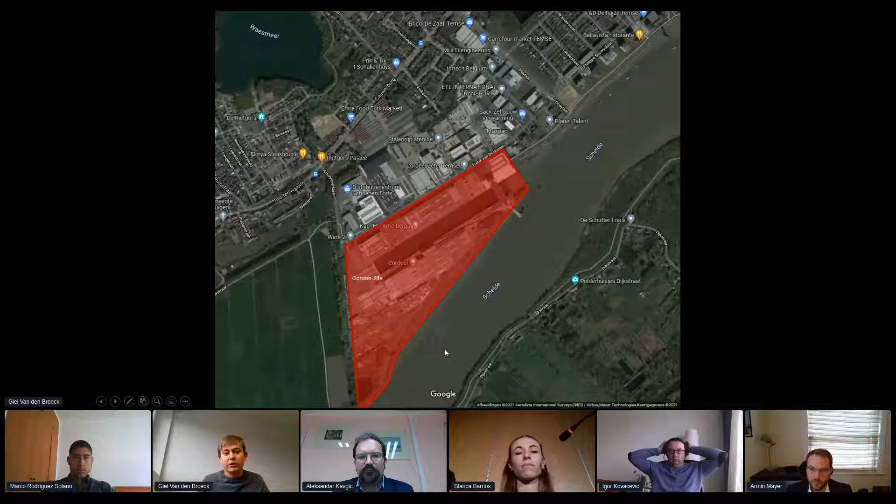But actually, Cordeel, of course, although it spans a large area in the city of Temse, we also have some interesting neighbors that we're willing to involve into this project. But first, let me show you already some of the energy assets that we have deployed in the past couple of years. First of all, we're prototyping and testing here floating solar PV panels in the dry dock.

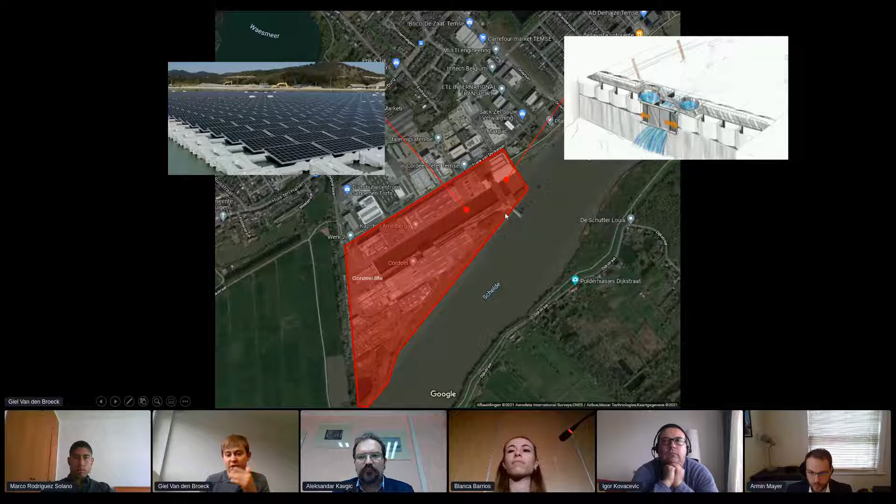Next, within the dry dock, because we have the river Scheldt nearby, which is running all the way to Antwerp, we have the capability here to also generate energy from the tides. So we can generate tidal energy by opening those gates when water is high, and vice versa when the water is low, empty our reservoir again and generate electricity that way. Besides also having some limited storage capability by pumping water back and forth.

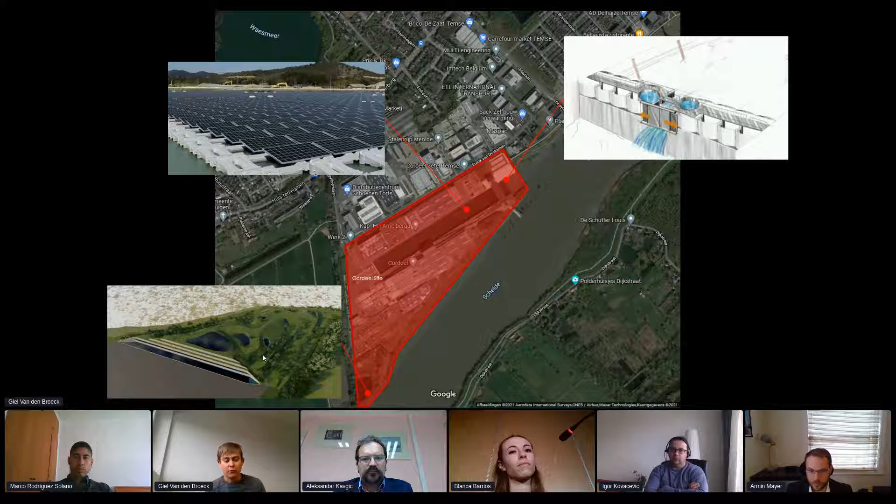More hydro energy on site that we harvest is by means of our energy hill. That's currently in the planning phase. So we use there the natural height difference that we have to cover about 10,000 cubic meters of water volume, spanning about 1 megawatt hour of electrical storage capacity.

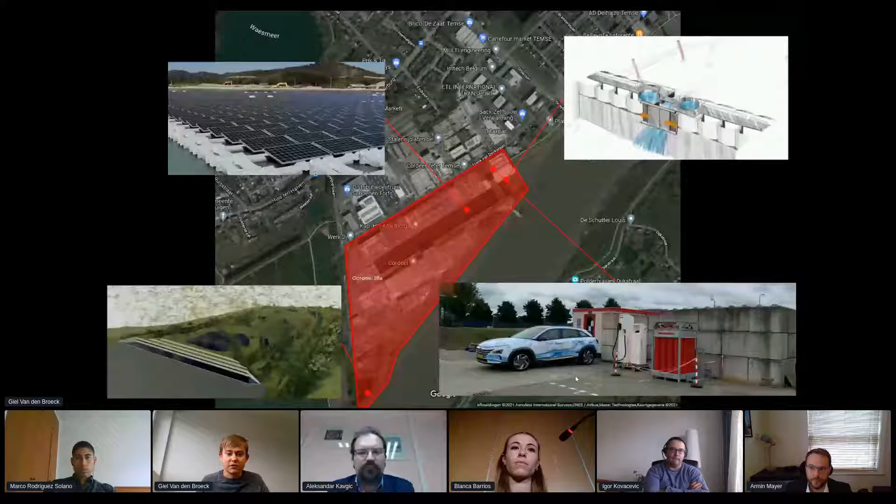And then finally, also at the level of hydrogen, alongside, obviously, regular EV chargers, we also have a refueling station for hydrogen that has been installed early this year. So we're trying to experiment with all these energy vectors on site to gain experience with them from a technical, operational, and also business level perspective.

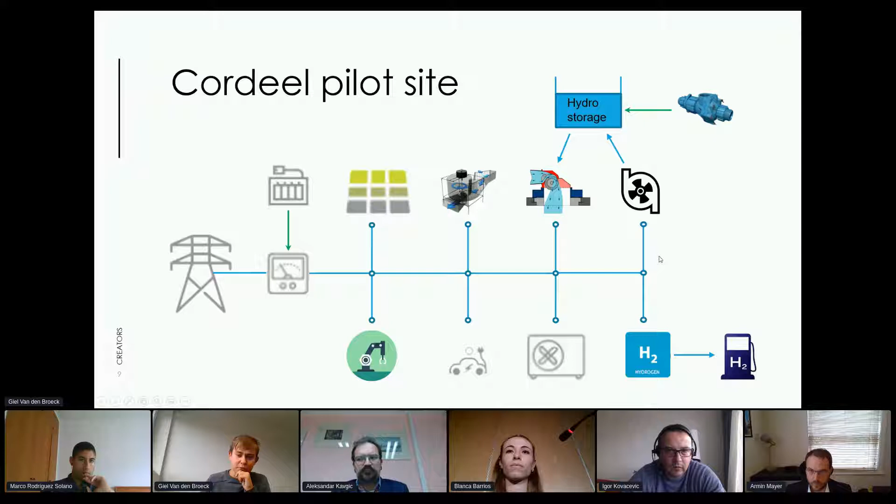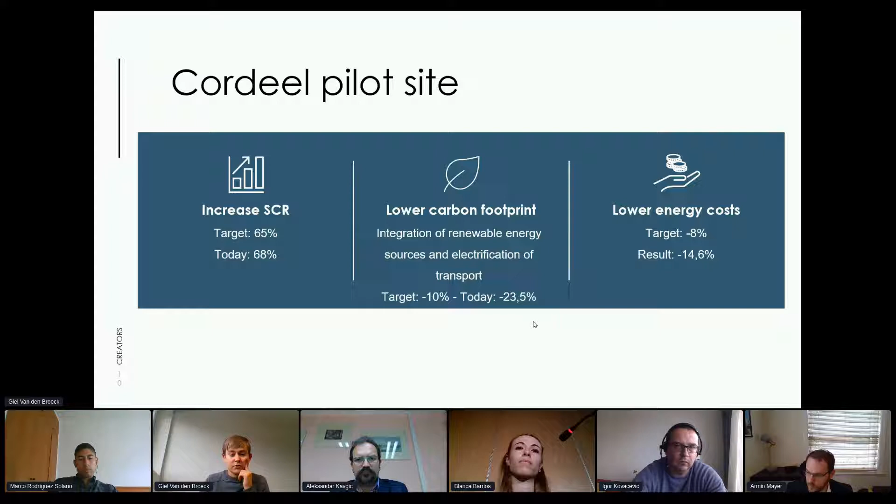Throughout the years, we set ourselves a target to increase our self-consumption ratio of PV generation. Currently, we are at 68%, while our target initially was 65%, but we have adjusted that now up to 80%. Of course, our main and central goal is to lower the carbon footprint of the site as such, where we currently achieve about 23.5% of emission reductions. And of course, this also has an economic benefit in terms of lowering our energy costs.

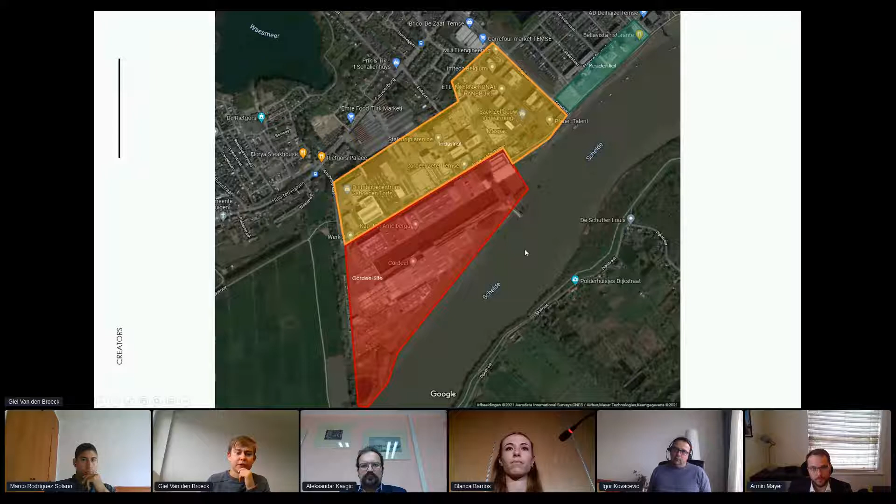So this is in a nutshell what I already presented. Something to highlight here is, why do we propose a local energy community here? That's because we observe that there's a significant mismatch between our on-site solar generation, especially in summertime, and the electricity consumption at that point in time, in weekends, but also during holiday periods where the entire site is basically shut down.

And that way we can use that electricity in the local apartment residences, as well as power the neighbors that continue working during those periods of time, as well as prepping that local energy community to also aggregate the flexibility reserves we have on site and provide those services to the higher level grid to help achieve the overall balance.

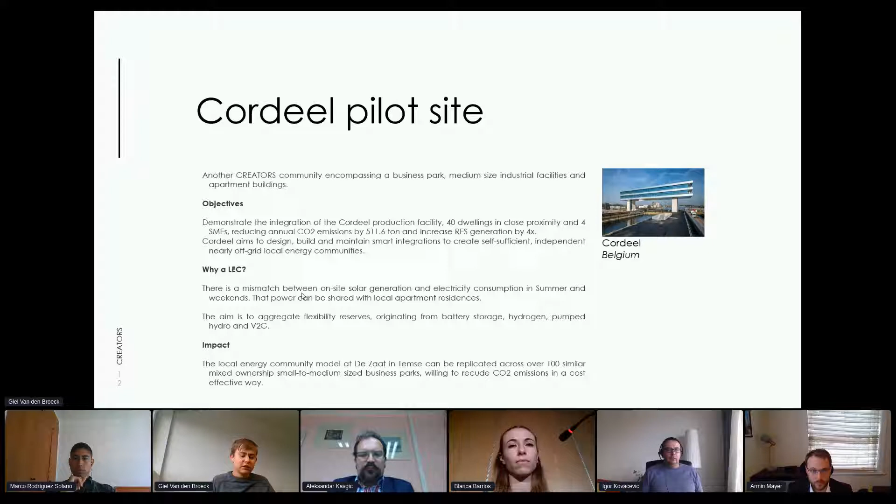alongside having a level of redundancy in the system that in case a cloud connection would fail, we still have some local control in place that makes sure that the system continues operating. Likely not in the most optimal manner as the cloud energy management system provider would provide you with, but still it will work and the lights remain on.

So that's in a nutshell what we have been doing in the past year, and also about the Creators project in general, what we're aiming towards.

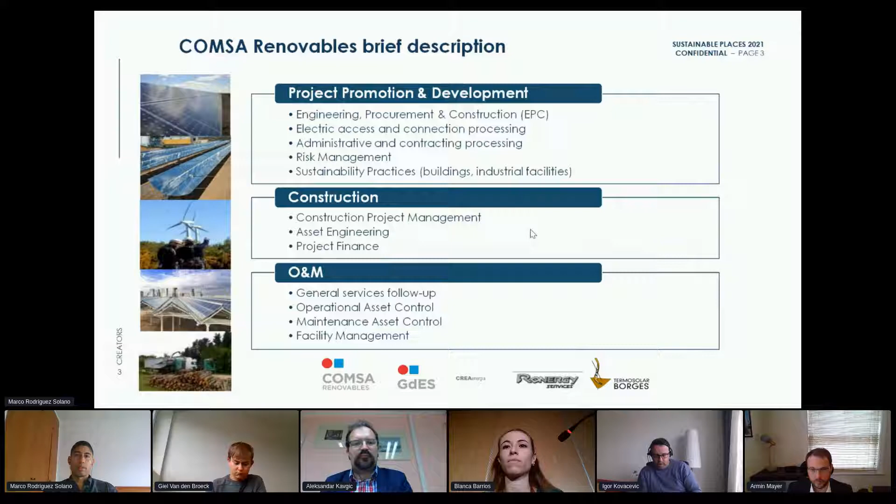But then we also promote different risk management studies, sustainability practices studies as well in the tertiary building sector and industrial facilities as our main core business. In terms of construction tasks, we develop also the construction project management, the asset engineering and project finances. Finally, we develop the operation and maintenance of these assets, buildings, industrial parks as well. And then general services follow up, operational maintenance, asset control, and facility management in general.

Well, a general view from the global building sector, just to introduce the topic more. Nowadays, according to one report published by the International Energy Agency, the CO2 emissions report says that CO2 emissions grew 4.8% after the pandemic lockdown that we had last year. Then 40% of the global energy consumption comes from the building sector in general. And 36% of the total CO2 emissions in the European Union are produced in the building sector.

So this is one of the sectors that we need to abate somehow in order to reduce the GHG emissions, in conjunction with some energy roadmaps, public-private alliances in countries, and a proper mentality change in societies. And with this, also the implementation of new green tech to accelerate the energy transition, we will manage to control these CO2 emissions and to reduce them as well.

Speaking more about the Spanish self-consumption scenario, as we are a company headquartered in Spain, we're looking through the scenario of PV self-consumption and the application of these scenarios in the Creators project as well. So here we have the scenario of the new installations for self-consumption PV in Spain.

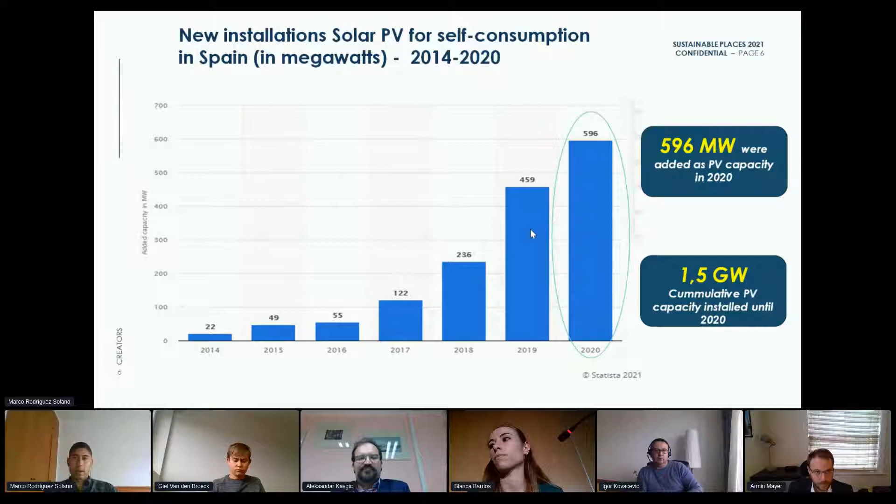For the year 2020, or last year, we had 596 megawatts of PV capacity installed, compared with only 22 megawatts in 2014. So there has been a 1.5 gigawatt cumulative PV capacity installed during the last 6-7 years. So that has been an interesting number to take into account.

Another important data is the scenario by sector in Spain last year. The residential sector accounts for 130 megawatts, the commercial sector for 137 megawatts, and finally the industrial sector, one of the most electro-intensive sectors, accounts for 334 megawatts.

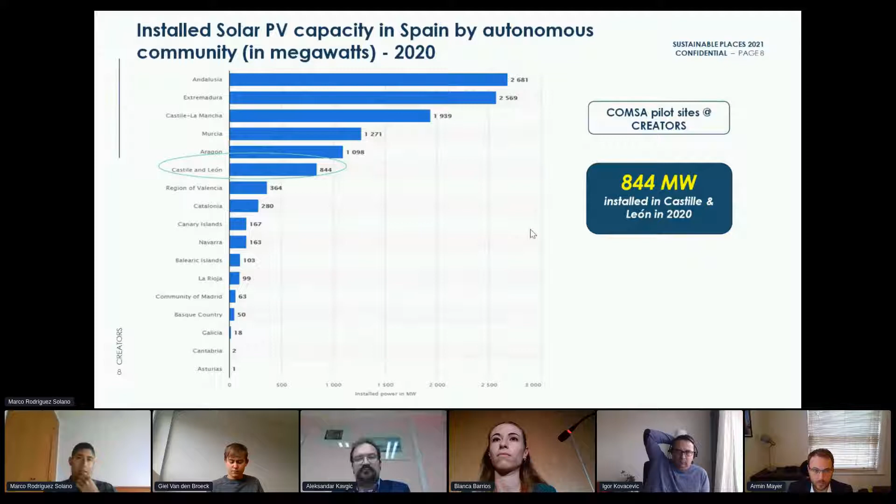So why are we focusing on the Spanish scenario? Because the Creators project has 2 pilot sites in which COMSA is involved, and both of them are in Spain. One of these pilot sites is located in Castilla y León, the 6th autonomous community, that has 844 megawatts of installed capacity for self-consumption. And then Catalonia, where we have another pilot site working on Creators. It has 280 megawatts installed right now.

So that's why we're focusing on these 2 autonomous communities at this moment, in which we want to develop local energy communities. In the case of Castilla y León, in an industrial park, and in the case of Catalonia, at the port of Barcelona.

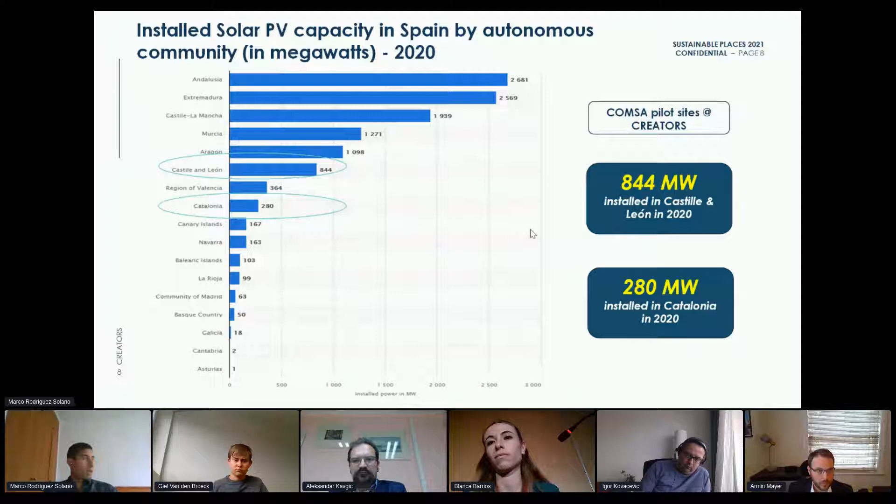So getting into the topic, this is a brief introduction of what a community energy system is. Basically, this is a scheme in which we can interconnect all citizens, SMEs, and other participants in a decentralized energy scheme, enhancing the figure of the prosumers. So we will gather investors, associations, prosumers, suppliers, and local authorities that want to participate, develop these new technologies and deploy them in other pilot sites, taking as reference the pilot sites of the Creators project.

So basically, this is a diagram of how a local energy community will work, in which we have different multi-users and multi-vectors. So we have here the CES, or Community Energy Systems, prosumers, that will be the industries, the households, or the citizens or common participants that can have an installation facility to be interconnected with the local energy community.

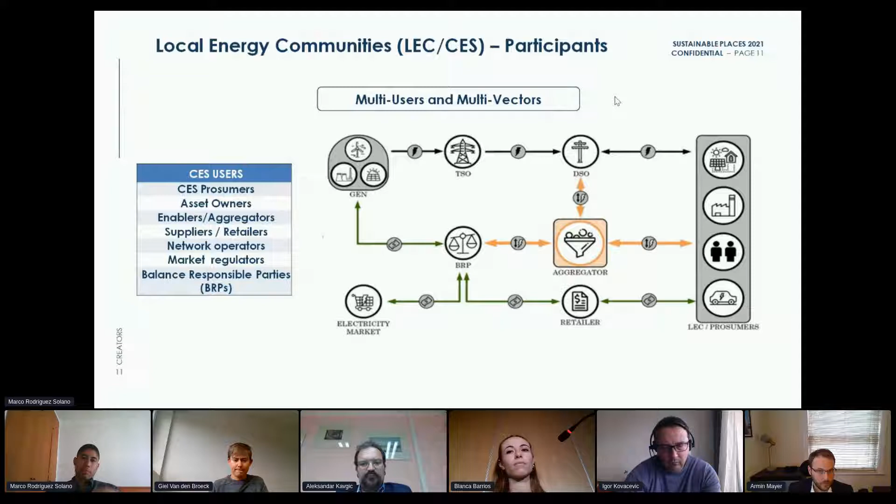Then we have the asset owners, or the enablers and aggregators, that will facilitate the development of these local energy communities through their implementation and operation. Then the suppliers and retailers that will also buy and sell electricity through the energy community. Then the network operators, market regulators, and finally the balance responsible parties that will act as aggregators, in which they can provide ancillary services, or continuous power balancing of demand and supply in this local energy community.

Some of the applications of local energy communities are in the tertiary building and industrial sector. COMSA Corporación, as a construction company, is focused mostly on these sectors, and here we can describe an interesting solution that can be applied in the project. The deployment of GEBs, or grid-interactive efficient buildings, in the commercial and industrial sector will adapt the new technologies and accelerate the green electrification for the customers that participate in these CES schemes.

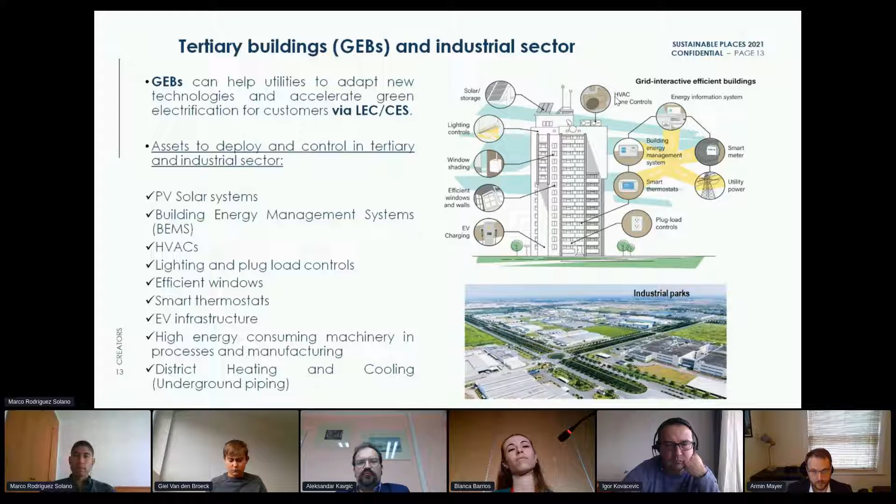The assets to deploy for these solutions are mostly PV solar systems, like BIPVs, or building-integrated solar systems, as well as building energy management systems, HVAC control, lighting, efficient windows, and also EV infrastructure. In terms of industrial parks, we can consider the high energy consuming or electro-intensive processes, like manufacturing or machinery processes. And finally, district heating and cooling, sometimes underground piping, mostly in cities or also in industrial parks.

So one of the challenges of enabling energy flexibility for the CES is how to increase the TRLs, or technology readiness levels. For example, if you increase the TRLs in one solution, you will also increase the energy efficiency, the grid interactivity and the load flexibility. In the end, with these kinds of solutions, speaking about GEBs or community energy systems, you will have a complexity and integration level that will let us improve and deploy these solutions for other pilot sites, and of course increase the grid flexibility.

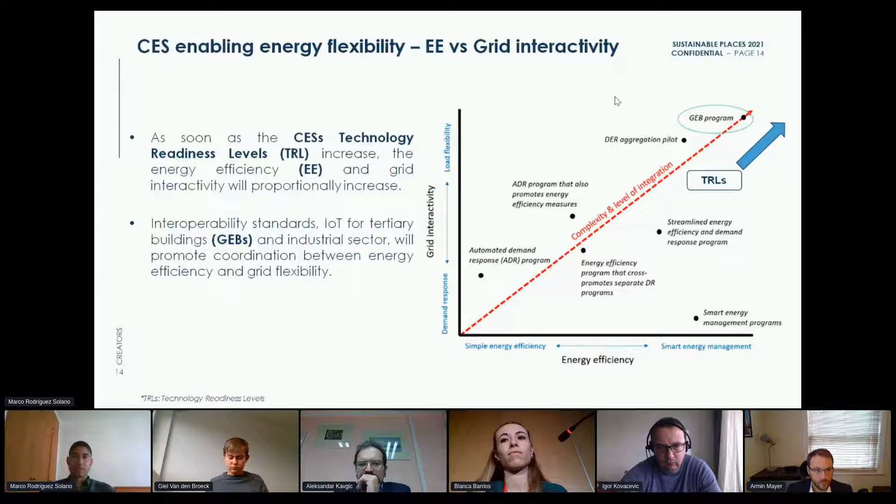One of the topics that is closely related to the local energy communities is the energy storage systems, right? But there is an interesting topic related with energy storage that comes from the second life batteries as battery energy storage systems for self-consumption, right? So basically,

after a market analysis from some reports, of course, from the International Energy Agency, we can say that 32 million EVs are currently on the road, but also 4 of these 32 million will be retired by 2030. And that means that 50% of these kilowatt-hour retired batteries will come from China, and almost 20% from the US and Europe will be retired, but they can be reused as second life battery applications or storage applications, right?

In the end, we can manage with 120 gigawatt-hours per year retired from those 4 million BEVs by 2030. So this is a huge market that we can explore for stationary energy applications that can be applied also for the local energy communities.

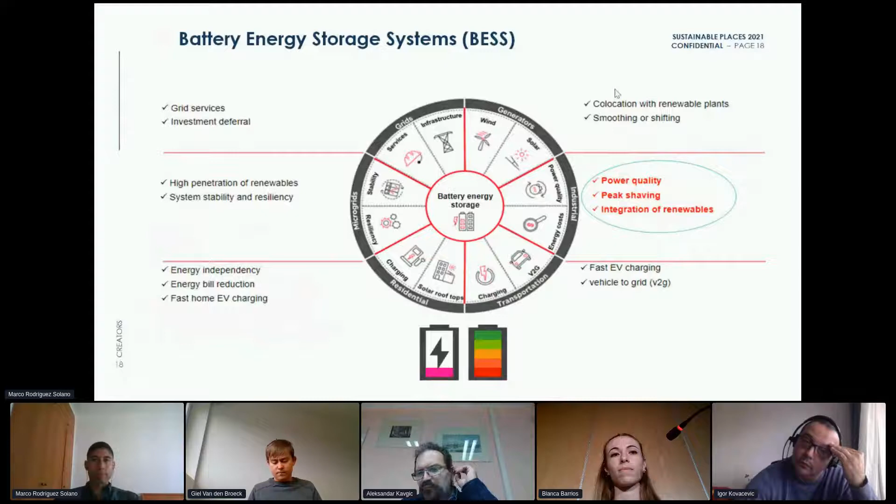Some of the potential functionalities of the community energy systems are related to these storage applications. So basically the integration of renewables and the controlling of existing and new assets as well. Then the internal balancing, like self-consumption, peak shaving, time of use schemes, mostly developed for the balance responsible parties, bilateral contracting and other controlling schemes

like congestion management for network operators, and then finally, again, the ancillary services as mentioned before, like frequency control, for example, the FCR, the FRR, or the aFRR.

A general flow diagram in which we can have a brief scope of how to select or how to start from scratch a stationary energy storage system. So basically the main goal is cost minimization of these technologies, right? In the end, if we want to apply them in one pilot site or in any project that involves these solutions. So we will focus basically on having the participation from the prosumers. With this, I relate to the profiles of demand and generation of energy from these prosumers.

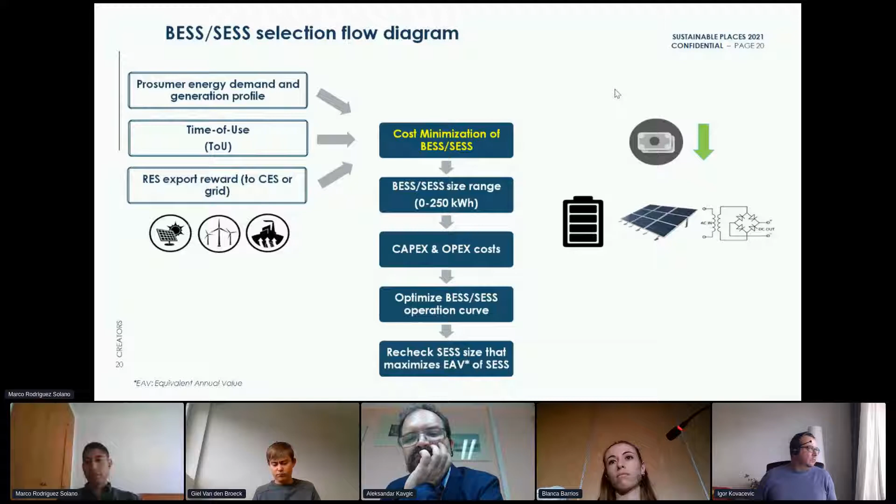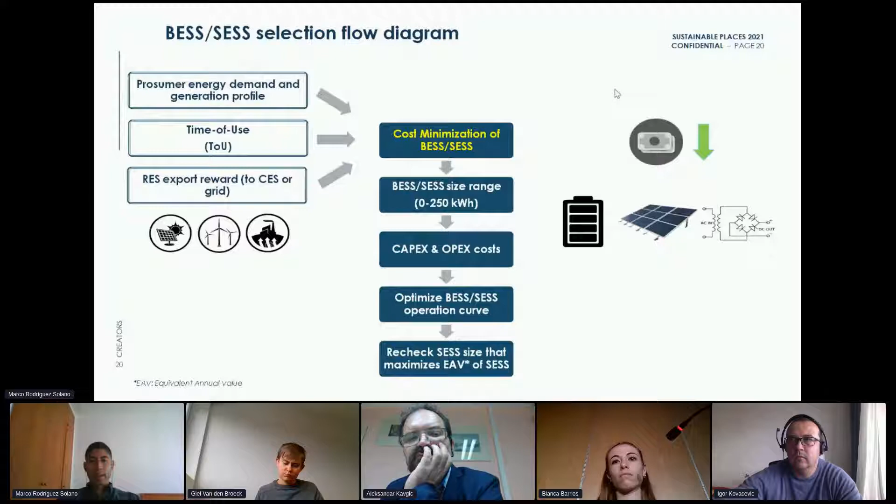Then we will have a size range from these battery storage systems as well, taking into account the CapEx and OpEx costs related to the battery storage system, inverters, and PV modules in the end, right? And operational costs. Again, with these energy storage systems, we will optimize the energy curve from the prosumers or from the participants of the local energy community.

And in the end, if everything is okay with the model, of course, we will monitor it, and also we will recheck again if the size of the storage system is the proper one for the application that we are applying it to, right? And then we will have an equivalent annual value of this project, or an NPV, a positive NPV, luckily, right? After some sensitivity analysis.

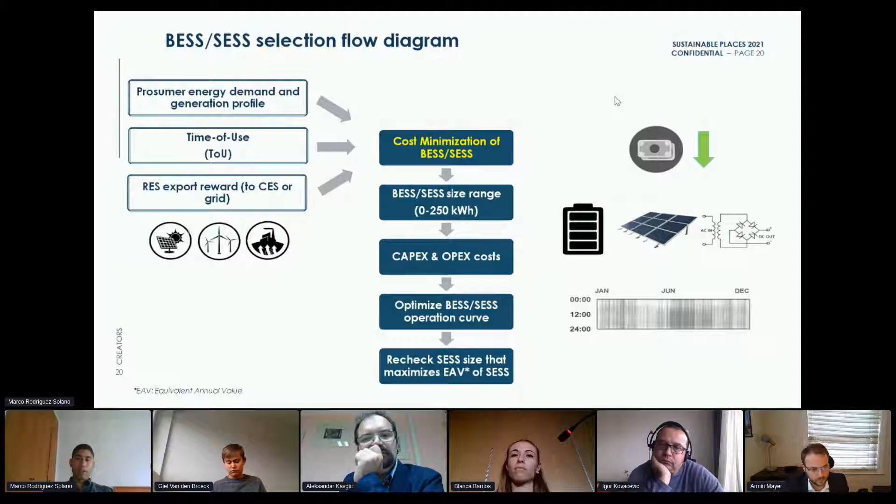Finally, some future insights of the stationary energy storage systems in the CREATORS tier 1 and tier 2 pilots, since this solution is applicable for both types of pilots. And it matters only the stage at which the pilots are right now. So tier 2 pilots, as the one that we have in Castilla y León, that's the one that I'm following up at the moment. It has a level of maturity that is advancing step by step in comparison with the tier 1 pilots that the other companies from the consortium have.

So the idea basically is to gather most of the companies with the higher energy consumptions, try to study the generation profiles, or also the demand profiles of them, because most of them already have some assets. And then we'll try to interconnect the existing assets with new assets as well, and deploy and develop the concept of a local energy community inside the industrial park in the end.

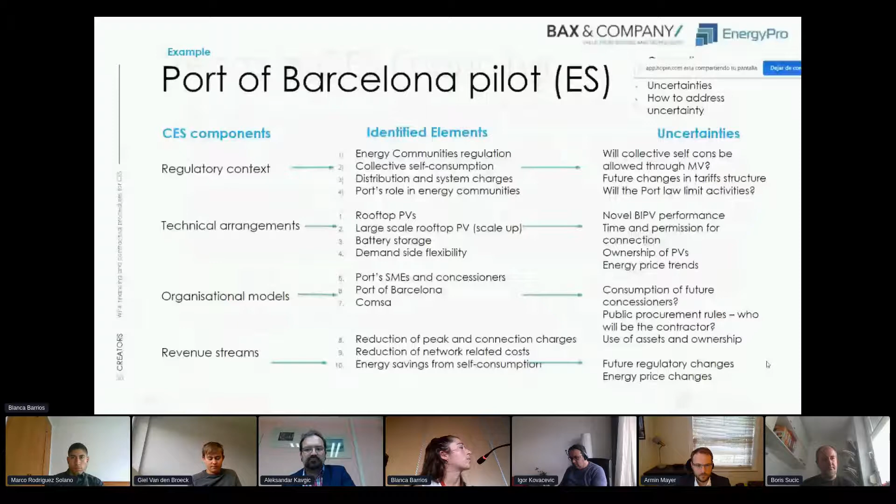So all this work has been done also for the other 3 pilot sites. If we don't share this slide, you will see this work anyway in the report. So now I will pass the word to Armin to present the main findings related to the trends in financing and our future work on the protocols.

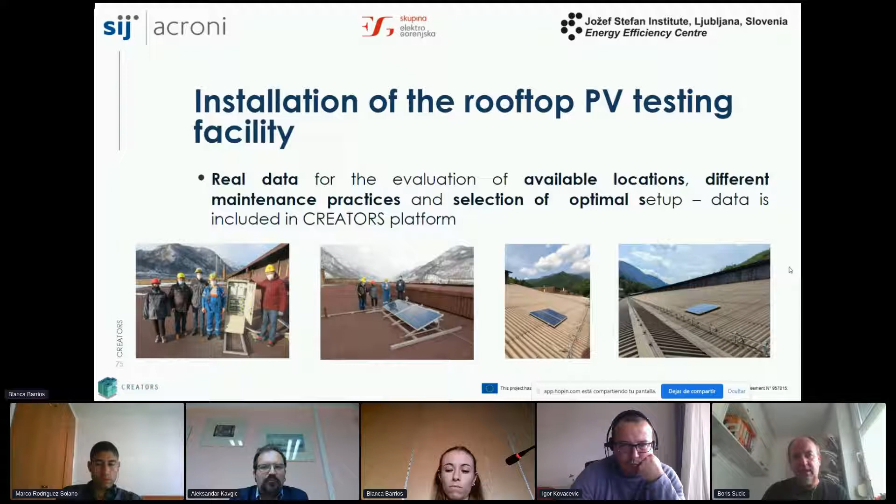This is the reason why a project like Creators has helped us, or has a great potential to help other locations, to check the availability before going into the real investment, to check and get the real data, which can be also very valuable for the final stakeholders who will at the end decide to provide the financing for this project.

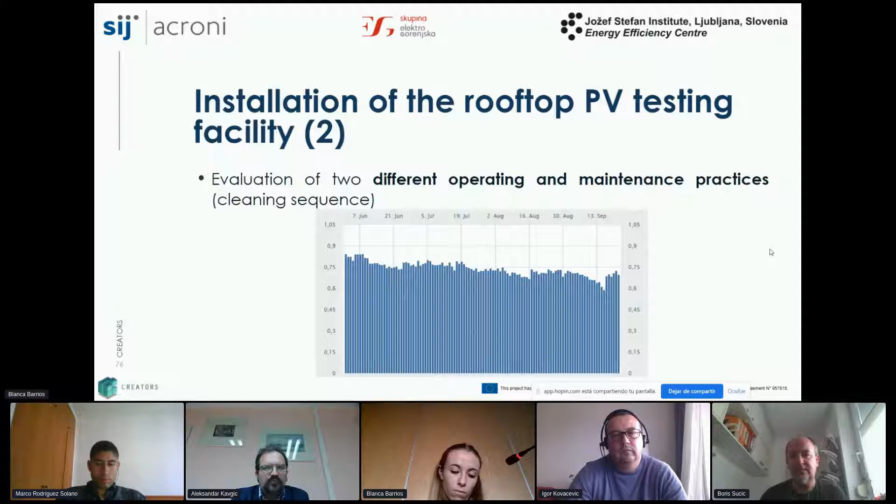Next, please. Our modeling has been based on the process integration approach in order to systematically optimize the energy efficiency of the complex industrial processes. Waste excess heat from the steel plant has a potential to provide the proper substitute for the currently used natural gas, which is used for production of heat in the local district heating system.

I will show you in the continuation of my presentation a few basic models that have been developed. We are still working on it, and I hope that in the coming months we will be able to have the first results about the compatibility of the steel production and operating hours of the local district heating system. Next slide, please.

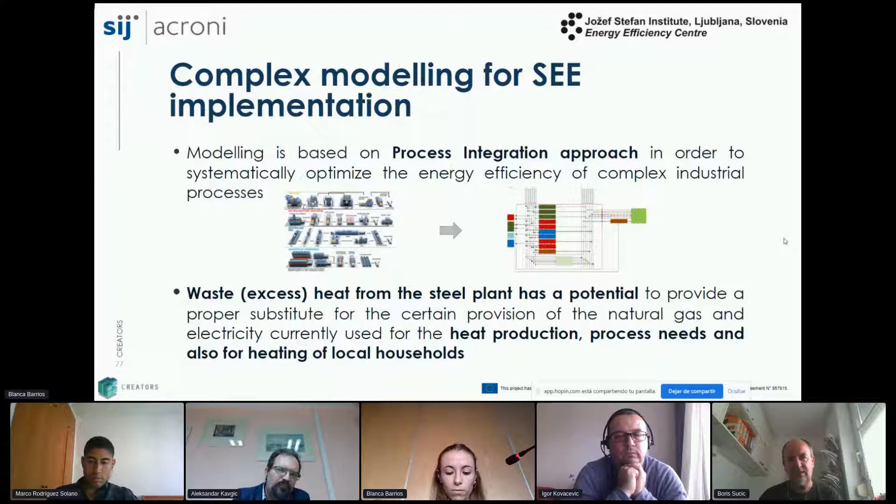Like I already mentioned, the geographical position of the steel plant is the most suitable location for the installation of the big rooftop PV plant in the local municipality. Hydrogen production, this is the story when we're speaking about steel industry. The hydrogen production goes hand in hand with the steel production because it is used for the reduction. And also we are proud that the hydro potential is higher than it was initially estimated.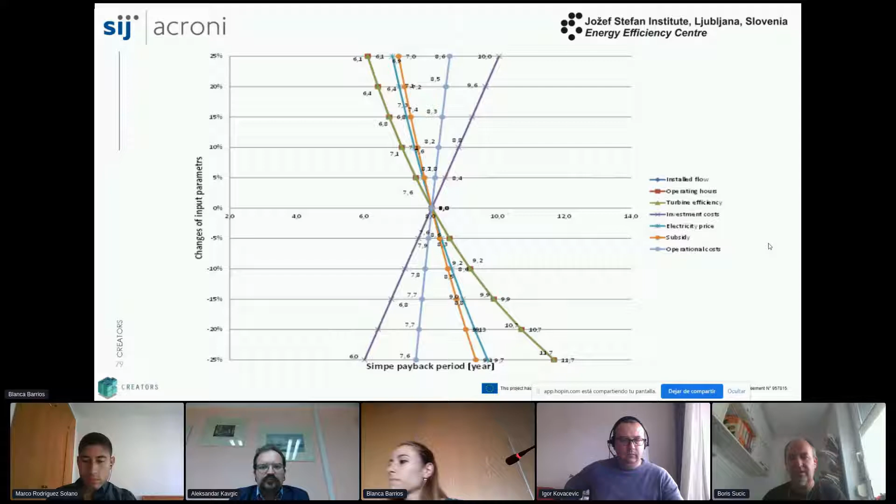Next slide, please. This is something that I have to put in all my presentations, because I'm coming from the research institute, so we like to make simple things look very complicated. That's our job.

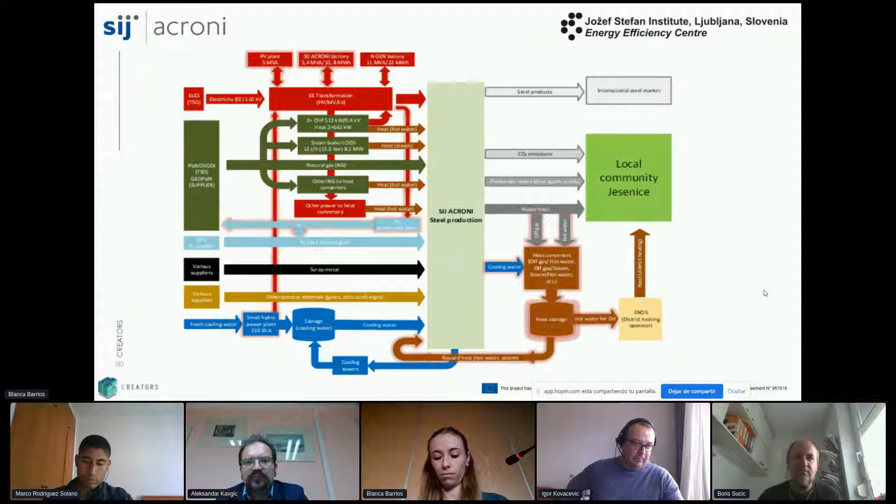This is the first model of the entire factory. It is the top-down approach. We have analyzed all the existing systems. Those that are glowing are future systems that have a perspective to be added into the complete story. Next slide, please.

Here we are showing how we connected, for instance, heat sources with the sinks, how we are connecting the flow of materials with the energy flows throughout the company. This model is based on the energy cost center methodology, which, as I mentioned before, is part of the process integration family. Next slide, please.

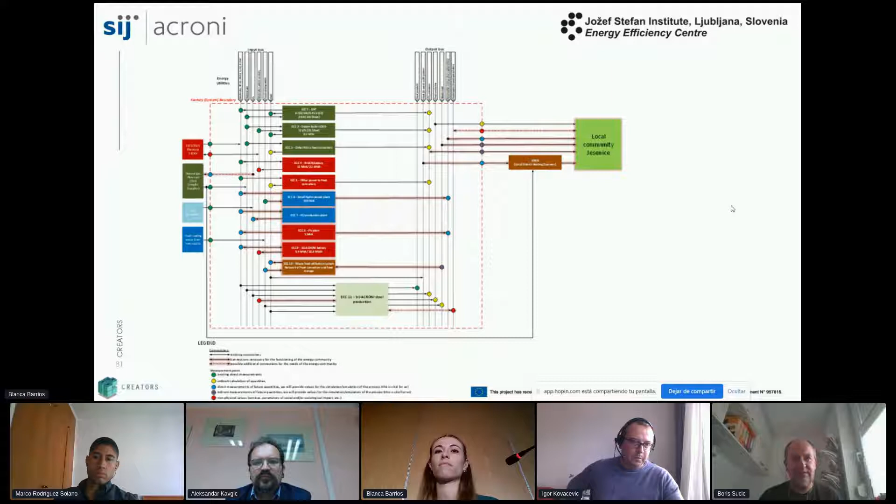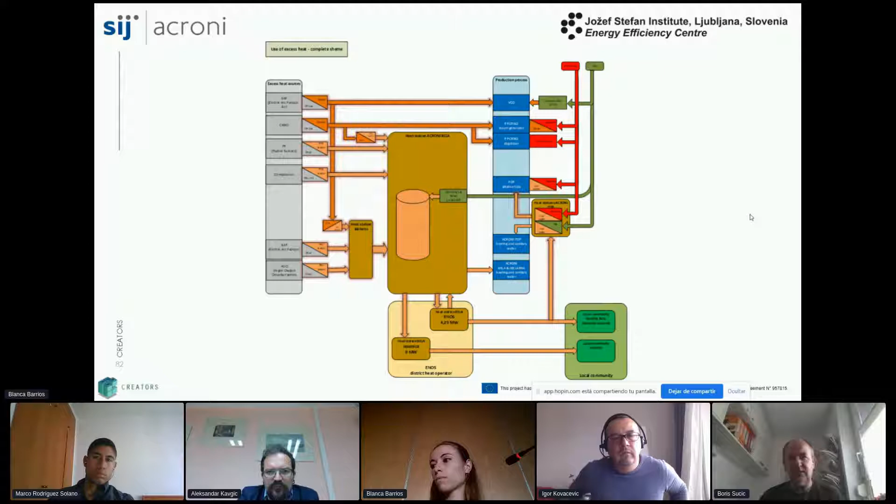And we go further into the details. Now we are analyzing the specific process, looking for the transfer functions between energy use and availability of excess heat. Next slide, please.

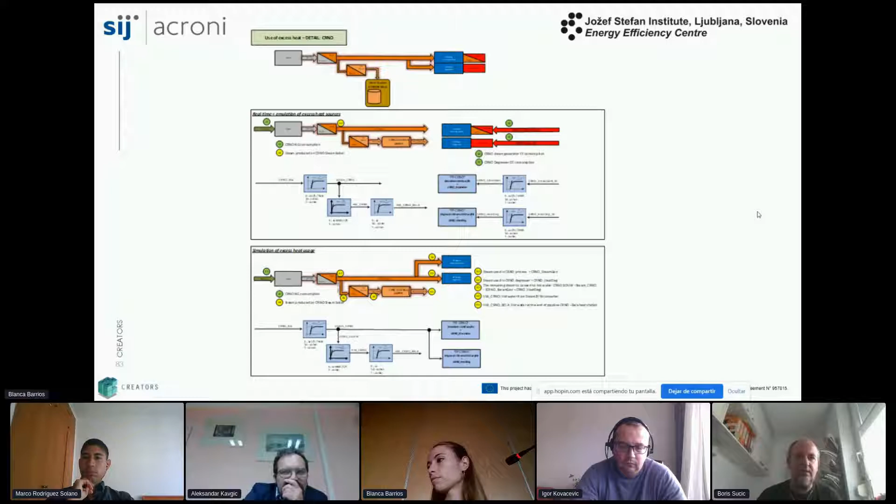And this is the final step, when we are reaching the final numbers and the final elements in the entire model. As you can see, it's quite complicated, but it is the only way we can be sure that time steps of the steel production and the district heating needs are properly connected. Next slide, please.

From the point of view of the Jesenice local energy community, which will be, I hope, very soon also implemented in practice, the simulation and emulation of the potential future situation is very, very important, especially those related with excess heat utilization.

During the Creators project, I must say, and here also I would like to share the floor with my colleagues from Typhoon HIL and i.LECO, because without excellent cooperation with them, some of these numbers or some of these things would not be able to be presented at this conference. We would never be able to develop such complex models and such complex evaluation tools alone.

I have mentioned many processes that have a potential for the extraction of excess heat. One of them, called rolled non-oriented, in our language we call it CRNO, is the thing that we are dealing with first. I hope that by the end of this year actual implementation work will start, and that we will start utilizing that potential of 1 megawatt of excess heat. Next slide, please.

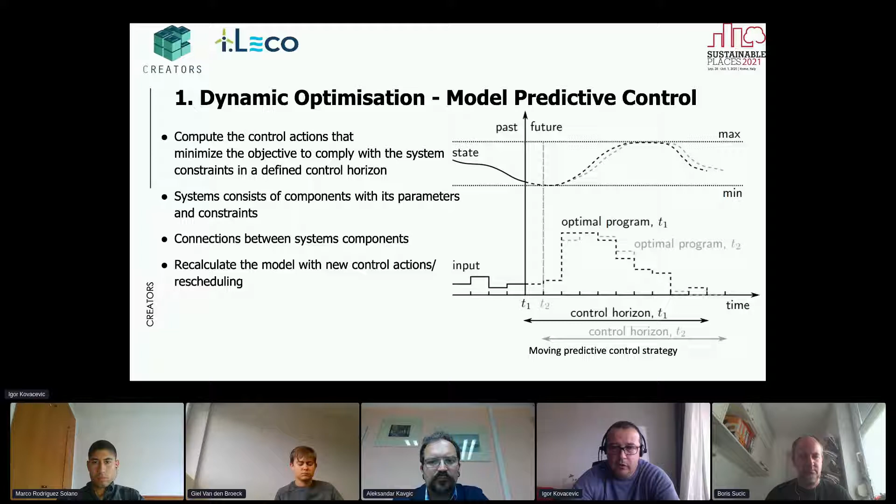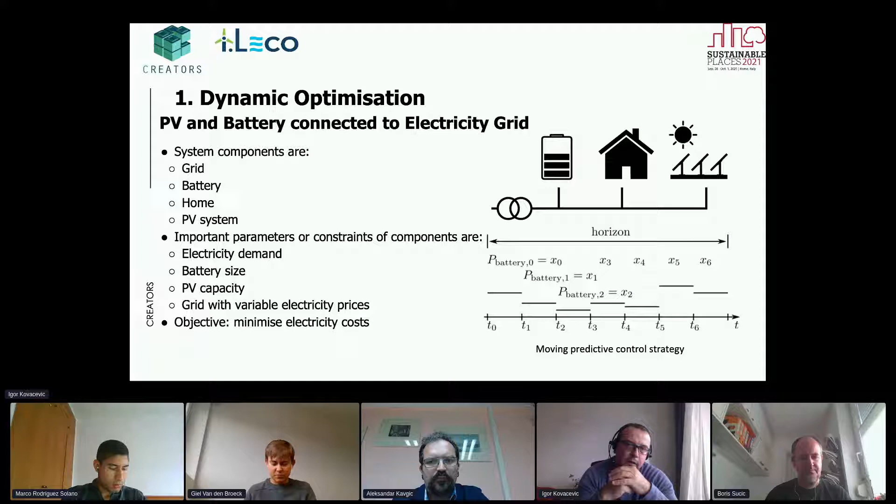Just a very simple basic example, and proud to say that such an example is already in simulation in our company on hundreds of cases. We are dealing with a 4-component system: grid, battery, home, and PV system. What we are doing is simulating what happens with demand or PV generation, and as the result of the optimization, we want to make the optimal schedule of the battery, so that grid cost will be minimized.

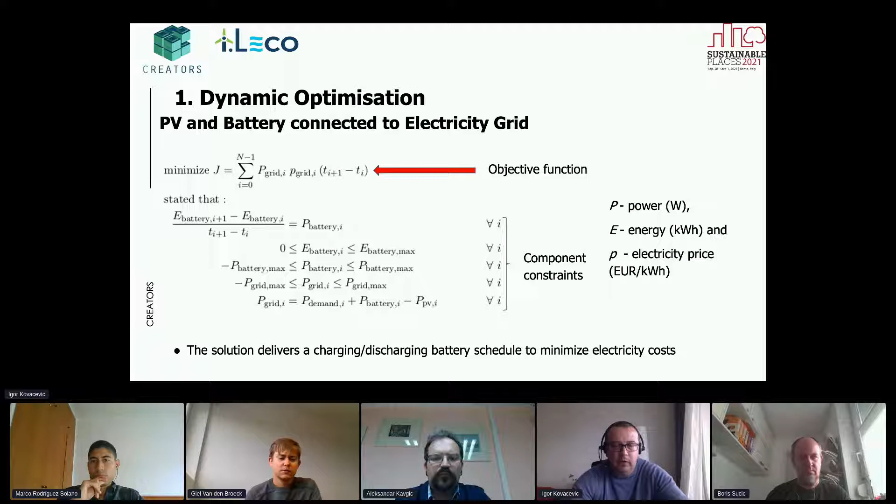And the last slide about this, it's actually a classical optimization problem. The simplest function we are using, of course, is not always the case, but in order to present it, we are minimizing the cost. Cost is related to the power that you are spending and also the price that you have during the time. And in order to do that, we prepare some constraints. Here are just a few examples of what we are doing with the battery, the simplest example that we are using.

On top of that, they are planning to install some roof PV generation and also some additional flexibility, maybe a stationary battery, but our task is also to analyze what will happen with the ice factory, which is the major consumer in this local energy community, if we want to control it in a smart way, in order to increase self-consumption and also to reduce the total grid electricity cost.

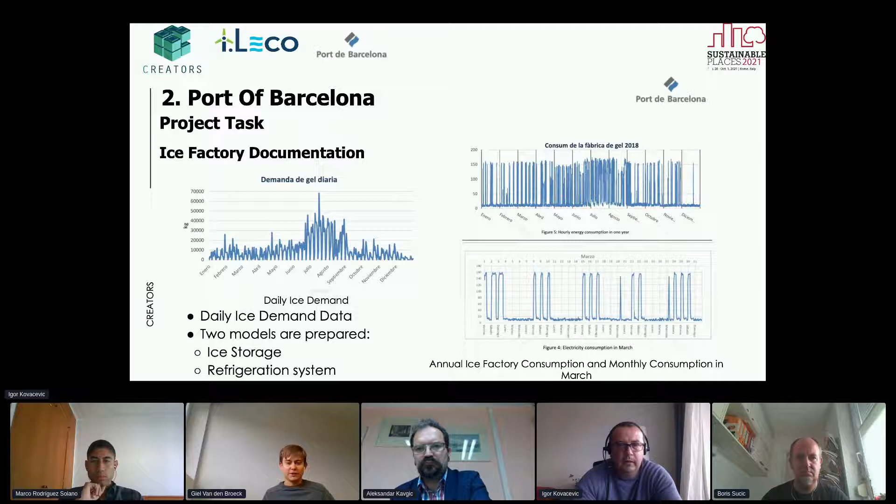For that, we prepared a lot of different models. One of them is for the ice storage system and also one for the refrigeration system. Not going into details, but as a first step in simulation, thanks to local partners, we received all information about electricity bills and all the contracts they already have with the local supplier. And the result of this is here. Our first task in simulation is to tune the model so that we get results similar to what we received from the electricity supplier.

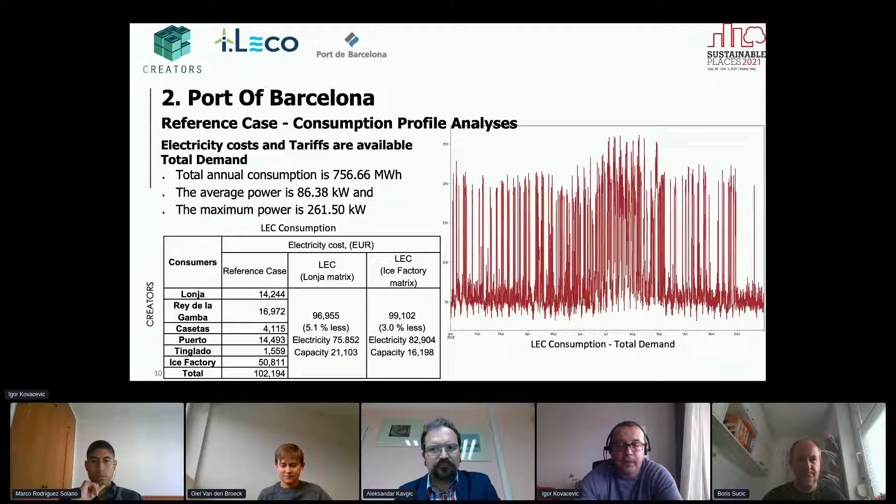And on the last slide of this, I want to say that we prepared the model and decided that the ice factory is driven by model predictive control, and on top of that we installed the local generation.

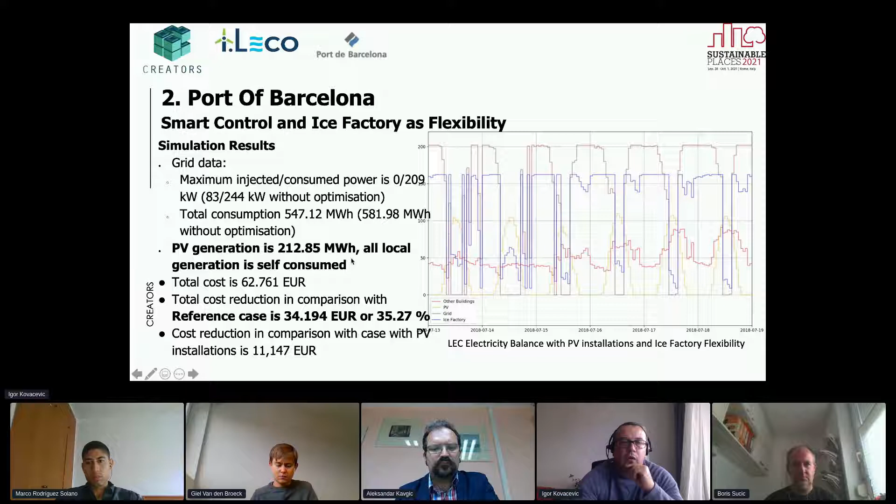And on this graph you can see that actually if we have local generation during the day, our systems are enabled; actually the compressor in the refrigeration system will follow the generation of the field, all in order to minimize the injection on the grid. And you can see here, because the compressor's size is quite high, we are able to demonstrate that all energy produced on the field will be consumed in the ice storage system.

Here are some results, and I can say that in comparison with the reference, the classic case, we are able to reduce total electricity cost by more than 35%.

Second example, I will just spend a few minutes on Temse. Thank you, Giel, you presented very nicely, but I also want to share that we are really proud to be participating in this project. One of the projects is also to control this very nice building in the dock of Temse. But today I will just briefly explain what we have there. It's a lot of technologies, a lot of playgrounds where we can play our games in this energy service field.

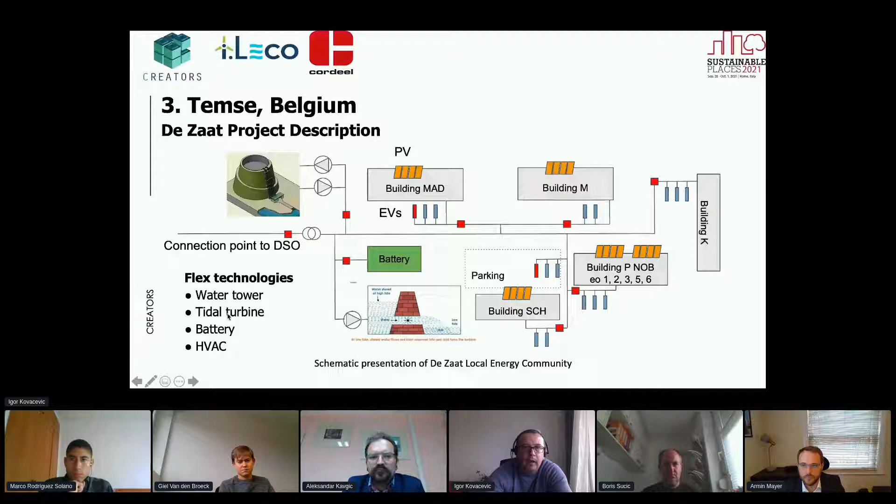The local energy community consists of 5 buildings, 4 of them with PV, and you see a lot of chargers around. As I mentioned, I'm talking now about the tidal turbine, and the renewable potential at this location is driven by the fact that the Schelde River close by changes its water level by more than 5 meters every 6 hours. And here is really measured data of the Schelde River in time. I think it was a 15-day window, maybe in 2021.

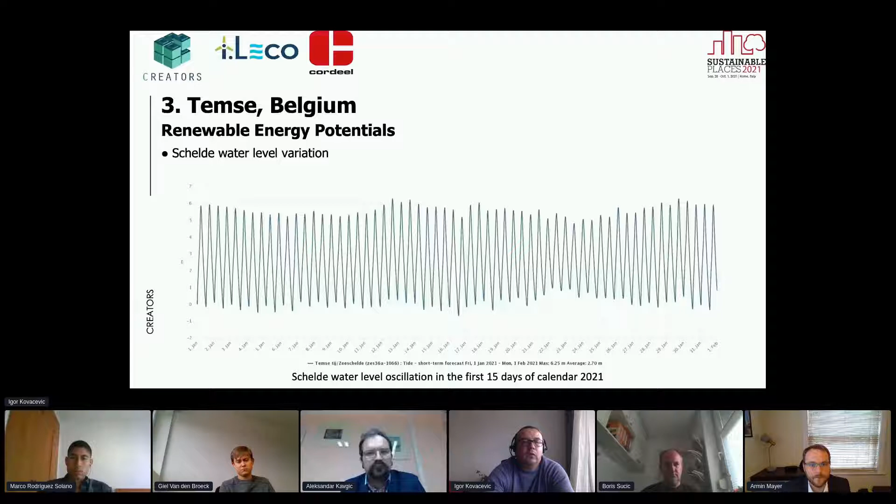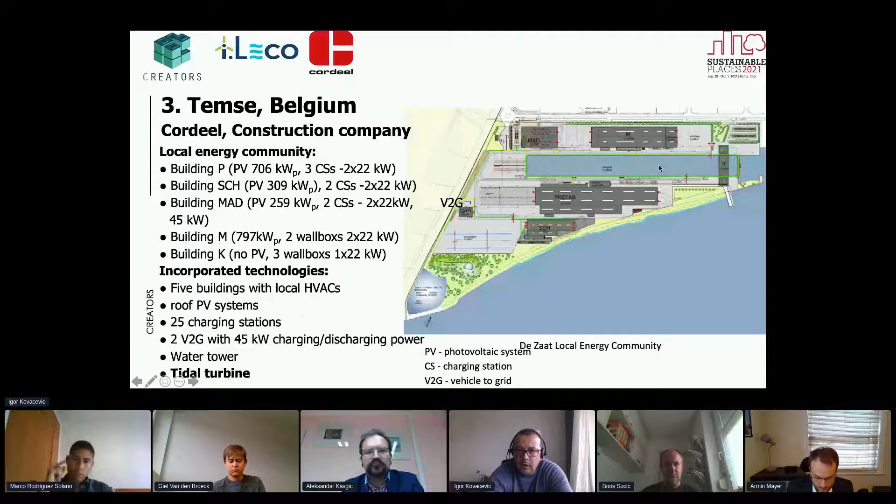And this is actually the driving force. If you see here, we have a dock, and this dock is actually an old shipyard, and the plan is to install the turbine in the gate of this dock, in order to use this renewable potential to produce electricity when the Schelde River is going up and down. I'm really proud to say that we developed a very comprehensive model thanks to the Turbulent guys, also a partner of this project. And the proposal is that we install a turbine of 200 kilowatt. This turbine is based on a vortex turbine, a very unique technique, and they are doing such installations around Europe and around the world. But for me, it's more important that they generate electricity in both directions, which means that when the Schelde River is going up or down, we are able to produce electricity.

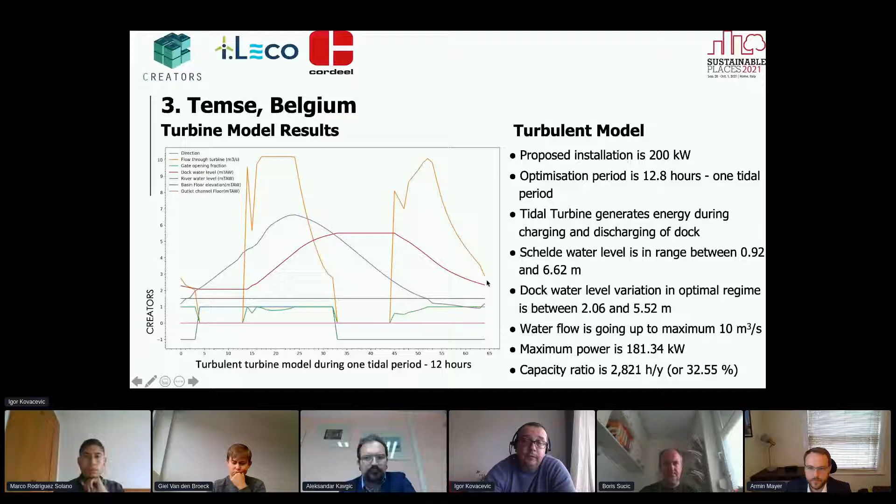Here is one example of one period. The blue line shows how the Schelde River level goes in time, the driving force for electricity generation, and the red one is the dock level. At the beginning, nothing happens. When the Schelde River is high enough above the dock, we start generating and produce electricity in this period. And you see the dock is charging, and after some time the Schelde River is going down, and we stop production. And after some time, when the dock water level becomes higher than the Schelde River, we are able to produce electricity once again. This example is very nice, so I wanted to share it with you.

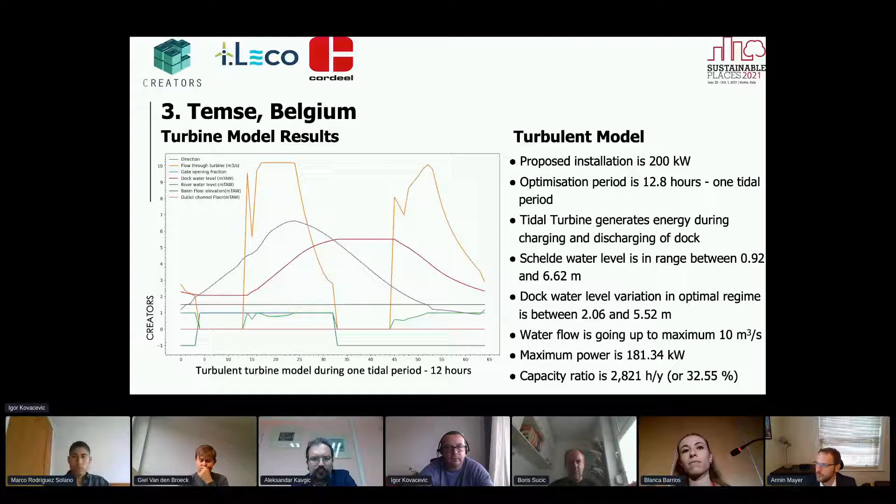Sorry. We're hearing some noises in the background. I'm not sure.

You don't? You don't hear them? Yes. Yes, we hear. Maybe, Aleksandar, can you close your microphone? It is closed. It's just you don't see it as closed. It has an off switch on its own. Can I continue? So maybe Igor, they are the headphones that are making this noise. If everybody's listening. No. Okay. We can hear them now. And sorry. No problem.

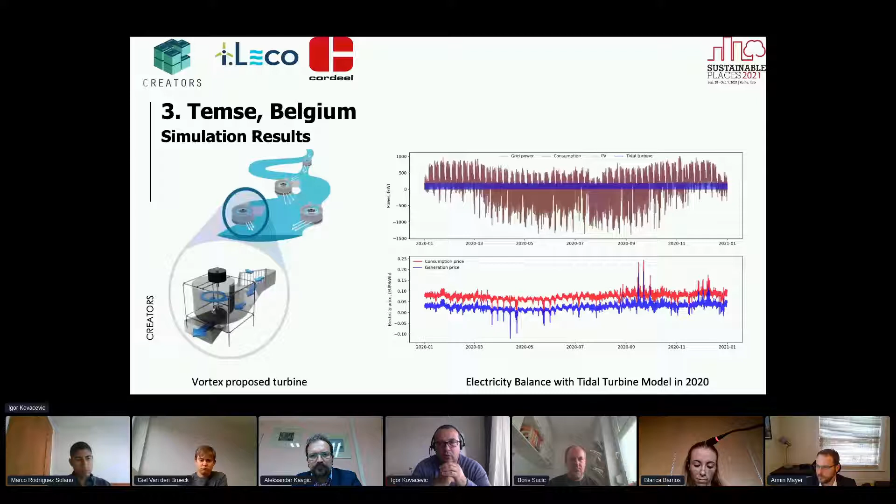Oh, yeah, and here is the calculation. From the financial aspect, we actually analyze what will happen if we install such a type of turbine on the place, and we calculate this on an annual basis, and we make a life cycle analysis of that. And I hope, and I think from what I heard this week, that the investor in this example, Cordeel, will go on with this project, and very soon we will have an installation of such a system, and my pleasure will be to continue to control such a very unique system that I present now.

And just a few steps about what we are planning in the future. Yeah, thanks Boris for a very nice presentation, and I did not have time to present a case about Acroni. Next time I promise that we will have such. But from a general perspective, I just wanted to say that I presented 2 examples about simulations, and what I mentioned at the beginning is just part of the simulation emulation engine. But from our perspective, just a few steps will be presented to see how this simulation is going in real control or digital twin.

If you want to go in real life, the first thing you want to develop is a forecasting service, and here I'm proud to present to you what our company has already developed. Here is an example of Belgium. Day-ahead electricity market, and we have a real life microservice where we are every time in position to see a lot of different machine learning algorithms, all in order to very well quantify the future of the electricity market in Belgium. And this will be extended also for the Spain market, also for Slovenia and so on.

And this is the current state and what I see as the next step. What I presented in simulation, we are doing offline, but if you are going online, we are able to produce such kind of things. And here, once again, you can see various forecasts, all based on machine learning, and all this information is already in the database. If I want to implement any project about the day-ahead market in Belgium, I am already in place to see what is the forecasted electricity price.

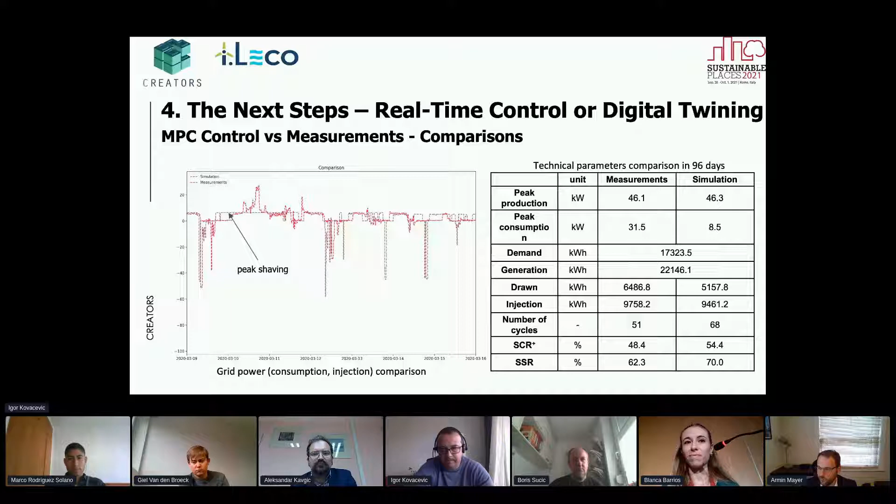At the end, I just wanted to say, we implement a model predictive control strategy for simulation controls of various technologies. We presented 2 examples, in Porto and Barcelona, where we use a storage system as flexibility for the whole local energy community. And in the second example, I presented a quite unique approach of a tidal turbine in the Temse location.

Yeah, I can say simulation, but also in optimization based on MPC. We demonstrate that it's quite a useful tool for investment decisions. Not only in the Creators project, we are active on commercial things around Belgium, the Netherlands, and Spain. Also, very active on other European projects.

And the last thing I want to say, simulation is just an integral part of a digital twin, what we are planning to do with the Creators project. And I'm really proud to be part of this team. And I hope that the guy from Typhoon HIL will continue and explain more about our strategy on the Creators project.

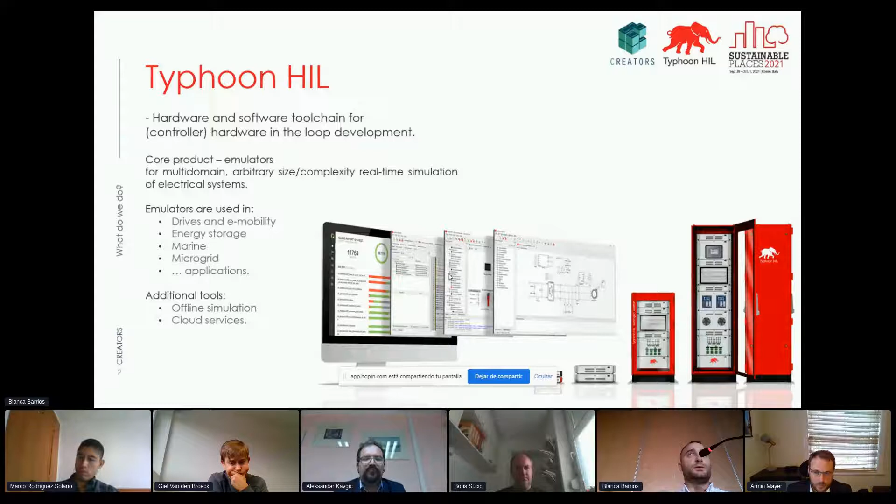But moreover, Typhoon HIL is not anymore just a company that provides real-time simulation tools, but we are also providing users with offline simulation. So the models that are developed in our toolchain can be deployed both on the emulators and on the users' PCs. And as you will see briefly in this presentation, and in more detail in the following one by Aleksandar Kavgic, we are also going to provide some cloud services.

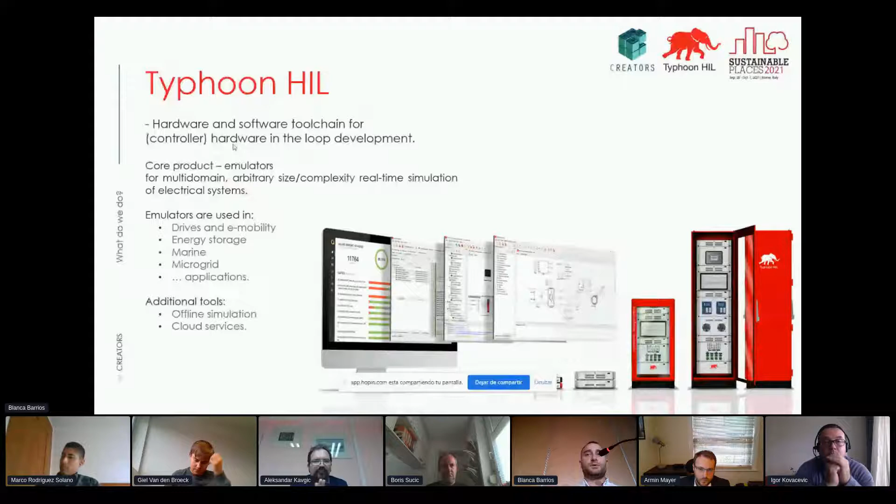So in broad terms, Typhoon HIL is a company providing users with a digital twinning platform in the domain of electrical systems. So this is what we do and who we are, and in the next 10 minutes or so, I will present how we can go on doing digital twinning. So the old way is the way in which we have been using standard simulation tools installed on our PCs.

The advantage of this approach, of course, is that many of those tools are already available. The community that supports these tools is also developed. There are many examples and tool chains developed. Perhaps the most important advantage is that we can really do detailed modeling. But the serious disadvantage is that we cannot do real-time simulation. The simulations in this model-in-the-loop approach are significantly slower than real-time, and we get only a rough idea of how the systems operate.

The next one is called software in the loop. It is different from the previous one in the sense that the control code or scheme isn't anymore made out of the blocks that come with the installation of the simulation tool, right? So in the previous case, in model in the loop simulation, we are making both the power stage and control schemes using essentially the same blocks.

But in the software in the loop approach, the control scheme is implemented using some embedded code language, usually the C language. So this is a convenient way to see whether the code that we are developing is going to have some organizational deficiencies, or whether it's going to have some syntax mistakes and something like that.

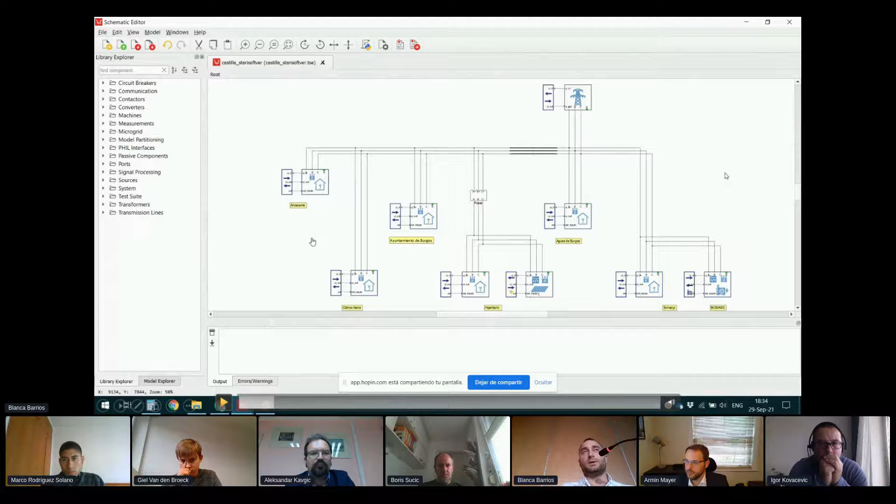So this is a model of one location in Spain of our partners from the consortium. Here you can see essentially a couple of passive nodes, and here we have a PV system, and also we have a CHP. What you have to do essentially to make this model at the moment is pick and place the elements from the library, make the network, and parameterize all the elements.

So in case of the PV system, you need to set what is the installed power, nominal active power, nominal voltage, nominal frequency. You should set what grid codes are going to be used, what are the characteristics of the filtering, and some other things, DC link voltage, and so on.

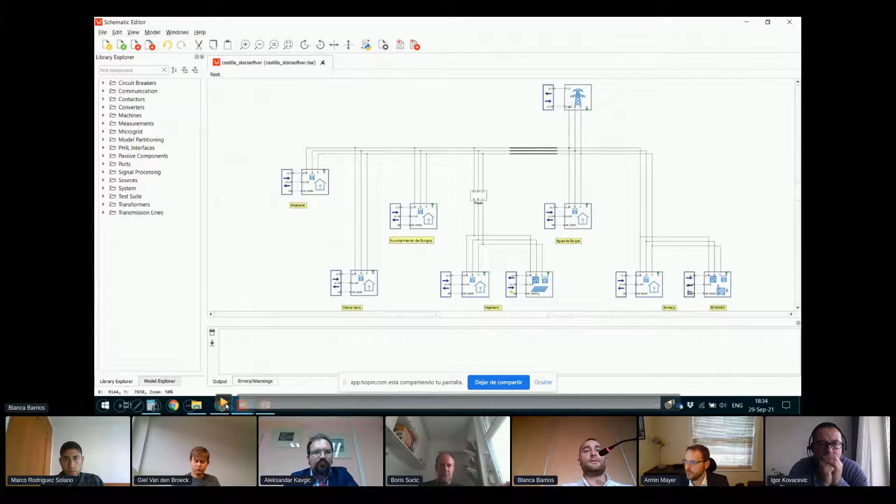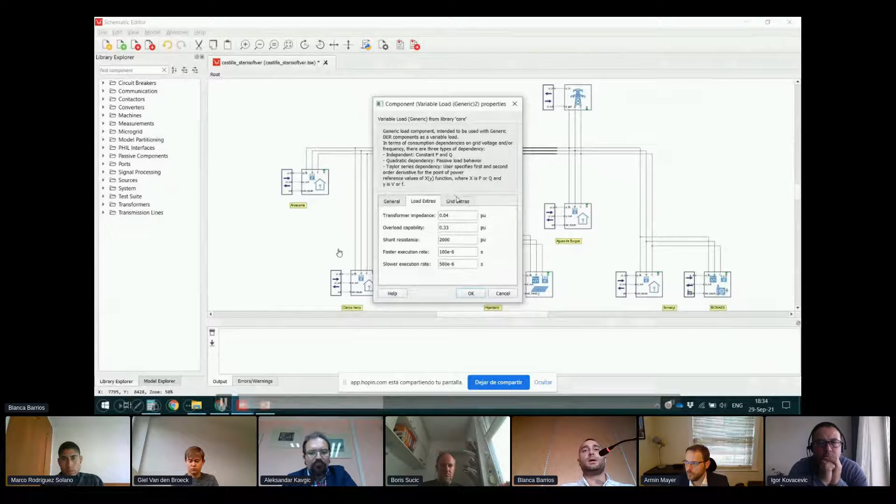And you also have to set the relevant parameters of the passive node. So installed power, installed reactive and active power. So some usual things, let's say, that are necessary for modeling such systems. And then, once you finish making the model, you compile it, and afterwards you will be able to run what is called HIL-SCADA, in which we are able to gather all the necessary information.

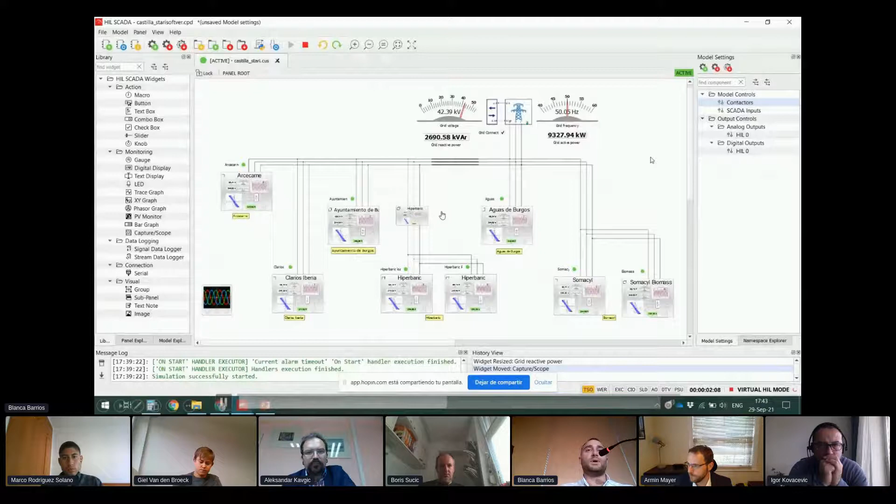So it looks like this, essentially. And bear in mind, here we have 2 minutes of the simulation. This simulation is made for 1 year. And here, once this icon is pressed, you will see the zeros, because none of the months have been finished. But you can see what is happening during the day. During the day, the PV system is producing some power. During the night, it's not producing anything.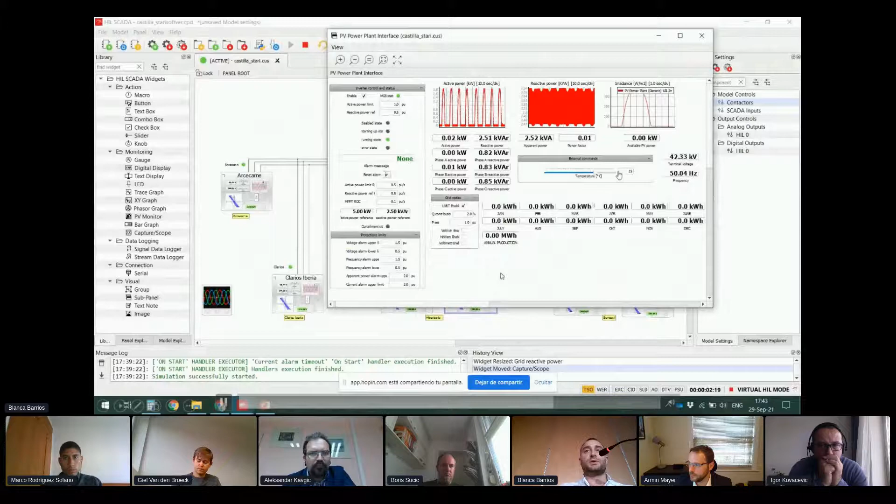Essentially, here on the left, you can see cumulative active power. And here we are going to have the data for the PV system itself, 1 day, 7 days production, and we can set the temperature, reactive power production, and so on. Whatever we can actually set in a real life application. This is the active power consumption, reactive power consumption, again, all zeros per month. This is the start of the simulation.

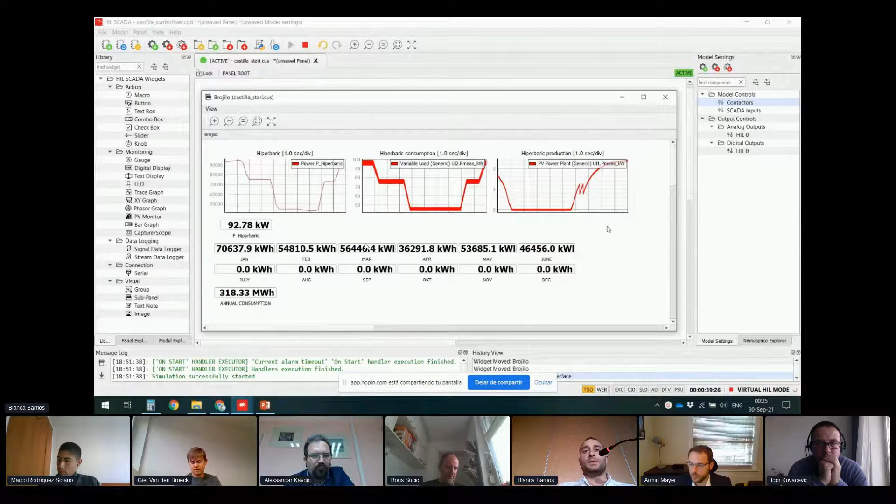Now, 6 months later, which is really some 30 minutes of the simulation. So roughly speaking, we need 1 hour for 1 year of simulation. We can see that, for example, April was a pretty sunny month, since the consumption was the smallest. We can see again what is happening on the level of 1 day and so on. The goal of this simulation was to find out whether we are going to have congestion problems within the said network. And as it turned out, there were no problems.

But what I can't show you right now is that exactly the same looking model could be made. It would consist of again same looking elements, but they would be modeled with a little bit more detail. The power stages would be modeled with a little bit more detail, and that model could be used to make some tests that are considering higher dynamics, essentially. And of course, that model would be run much slower, but still at least real-time simulation could be achieved.

And also, the models themselves can be run on, I'll quickly finish. If you can get finished, so we have time for Aleksandar's presentation. In maybe 2 minutes or less.

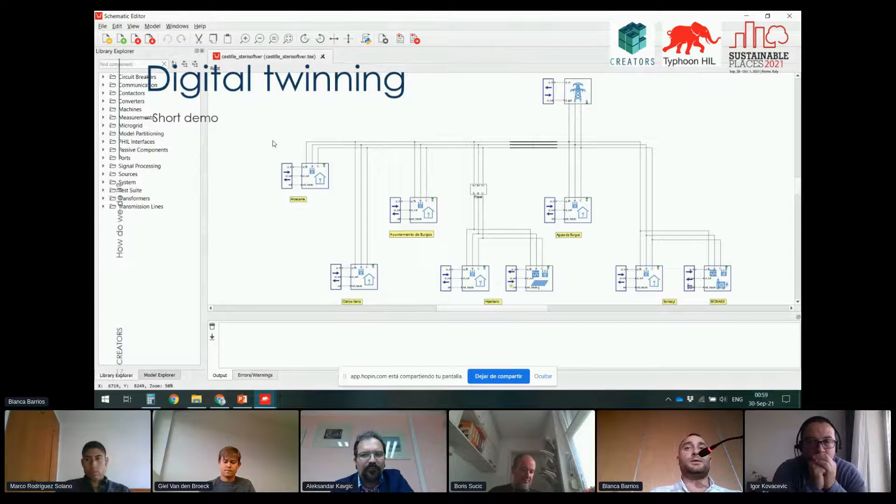So all the models can be executed on the emulators, on the PC, personal PC, and of course in the cloud. So to conclude, there are many different ways how we can conduct our digital twinning. Some of them really are not meaningful for local energy communities. Controller model really isn't something that we are interested in, but even those regarding the power hardware in the loop aren't something that we are supposed to consider that much.

But what we are using and can use is model in the loop, software in the loop, C-HIL, so controller hardware in the loop, co-simulation, and of course we are developing at the moment cloud services that are going to enable us to do what we actually want to do. We want to essentially become Laplace's demons, which means that we really want to know what is going to happen with our local energy communities, and not just assume something and wait for a year or two for the information loop to close.

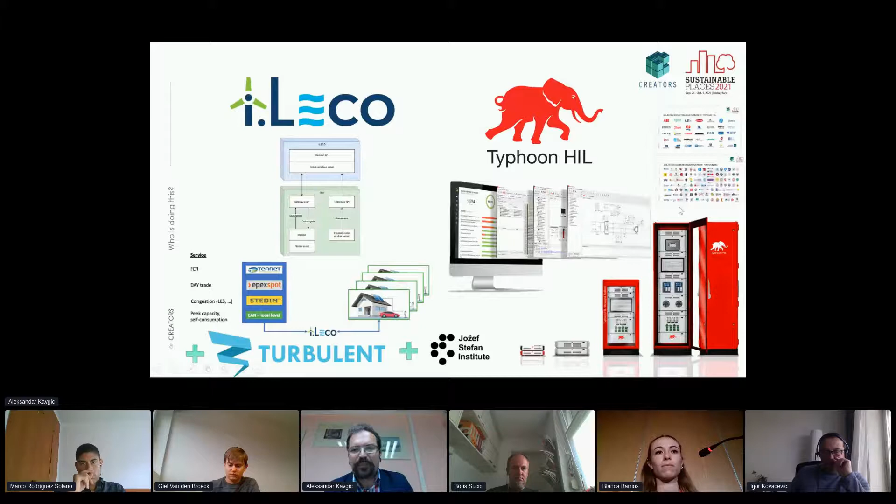You already heard the description of Typhoon, so I will just mention that we are present in the industrial sector. These are some of our industrial customers. Usually these are OEMs like ABB, Schneider, Toshiba, Caterpillar, General Electric, Fronius. And we also have a lot of traction in academia, but I will skip this part.

So the main question is why we are integrating these tools. Why are we creating the simulation emulation engine? Primarily because of the things that Energy Pro and Bex told you about: when you approach people who desperately need a local energy community, there can be some doubtfulness, some puzzlement and unclarity, because this is a new technology that is now being implemented by innovators and, very partially, early adopters. You are probably familiar with Crossing the Chasm by Geoffrey Moore as a paradigm.

So the people need to be sure that they can enjoy complete peace of mind when this is deployed into their physical sites, that there will be no negative effects, that all the positives that we are bringing financially and in other respects are also going to be followed by stability in the technology that makes it happen.

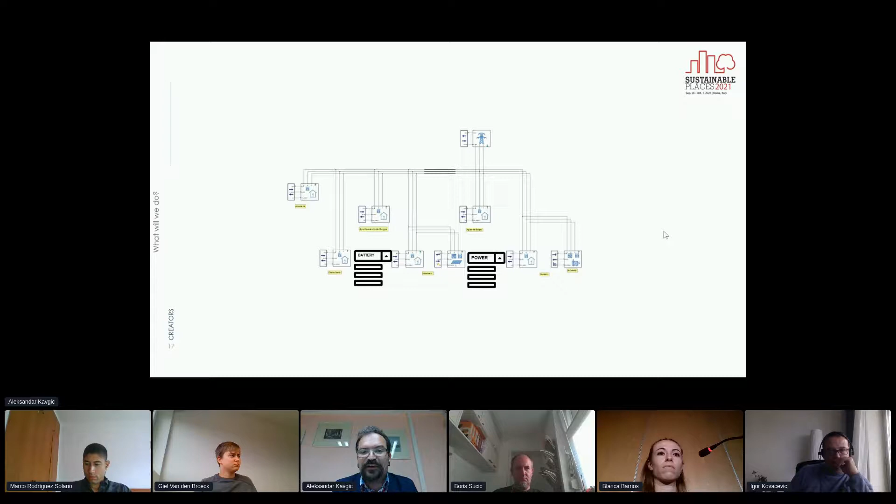There are many levels below this, but ultimately, the simulation emulation engine will enable you to create this kind of schematic for your local energy community. Behind each of these boxes is actually a separate facility. Specify its power, specify, for example, the capacities of the batteries that are present there, specify the mode in which a specific part of the site or a device operates, specify the type of the grid that you're emulating, stiff or weak grid, and then choose a scenario, whether it's kilowatt max, time of use, self-consumption,

and then simply run this model based on these parameters, taking into consideration that you don't have to use any specific tools, but can access this from a browser window, where data for this scenario comes from i.LECO database, or theoretically there would be maybe even a possibility to upload some comma-separated values. Or in case of partners in the project, this will be also coming from real gateways, so you could do A and B testing, and you can then visualize this scenario in the i.LECO cloud.

And i.LECO, in addition to everything that you heard from Igor, is also an expert in creating wonderful visualizations for different scenarios, including the energy you spent, you saved, the profit you're making, but also the details on each of these scenarios. So that's the ultimate plan, to have a platform that allows you to see. That's why we call it SEE, Simulation Emulation Engine. It allows you to see the big picture of the local energy community that you want to build.

On top of that, this paradigm, which is based on cooperation with our wonderful partners, is that the platform can also be used beyond the project for the complete life cycle, because once you have these models in the simulation emulation environment, you can test the model, you can keep the model as a digital shadow of your real site and try to see how it matches upcoming or new grid codes.

You can use it to assess the validity of new business models, test how new assets could benefit or be detrimental to your local energy community, and generally analyze new optimization. So we see this SEE, no pun intended, we see SEE as a life cycle management tool for local energy communities. Of course, we are now halfway to making it happen.

We are in the development phases, but we are already ensuring integration, and the models and the optimizations are being developed, as you heard from AECOO, and as also you heard from our partners in Cordeal and COMSA and everybody else who presented. So since time is running out, I will skip the minute technical details.

I have many slides, but fundamentally we use the know-how from a previous project where we had successful cooperation with AECOO, where we were focused on 5 pilot sites ranging from industrial to residential, where we were focused on simply demand response in the sense of switching on and off and shifting loads. And this user interface required a degree in coding.